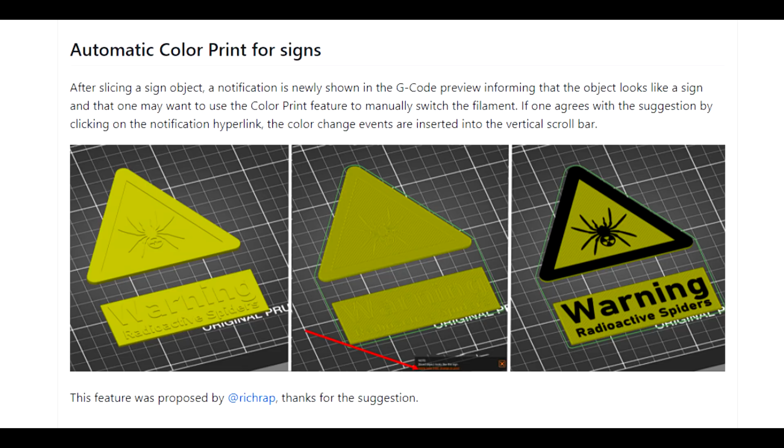First up is the auto colour change detection feature, which I'm excited about because I do make a lot of signs, being that kind of person. I have to say this is more of a quality of life feature because it doesn't do anything that you couldn't do before by yourself. How it works? It uses an algorithm to determine whether the object you're slicing is a sign or not. And here's a sign I made to test it. Basically, you slice it, then the dialogue comes up in the corner like so, and you click it, and it puts the colours in, and you have to slice again.

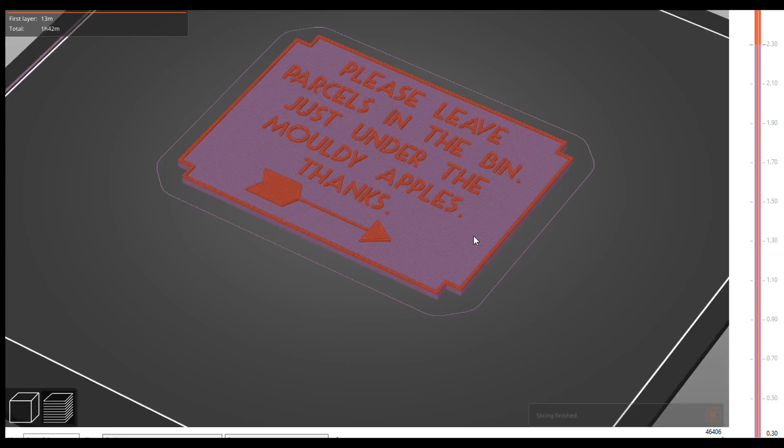Of course, I had to know how Prusa Slicer decides what makes a sign, and I couldn't find it documented anywhere other than in the release notes, which is a bit vague. So, I poked around in the code, and I found this. Now, trying to understand code is literally the worst way of documenting a feature, so I'm probably going to get some of this wrong. But you can see this section contains the logic. I think it's all the logic, actually, which is nice.

We've got, if it's a new print, then work out the X and Y size and the height, and check if the object's height divided by the longest size is less than 0.3. So, in plain English, we're looking for something flat, basically, here, I think, in dimensions. If not, it just jumps out of the if statement, which avoids the dialogue coming up. Next, it does some stuff where it's testing if 25% of the height is a solid object. This is using some maths that I'm not going to work out, and as you can see from the comment, the bottom layer to object size is also important.

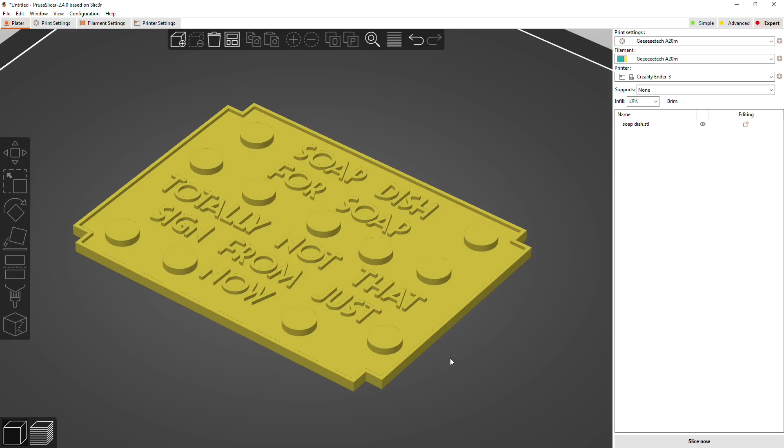And if all of this is true, you will get the sliced object looks like the sign notification, which is translated to whatever language you're currently using. So that's pretty reasonable, I think. Of course, you could fool it into thinking you have a sign when you don't, but whatever, just don't click on the prompt when it appears. I personally like this functionality because it saves you having to spend time working out which layer to colour change, and it saves you having to learn how to colour change if you haven't actually done it before, or if you've forgotten how to do it. As to what it actually does, it puts essentially what's in this box here, in the machine settings, into the G-code. Here we can see that if we search for it in the generated code.

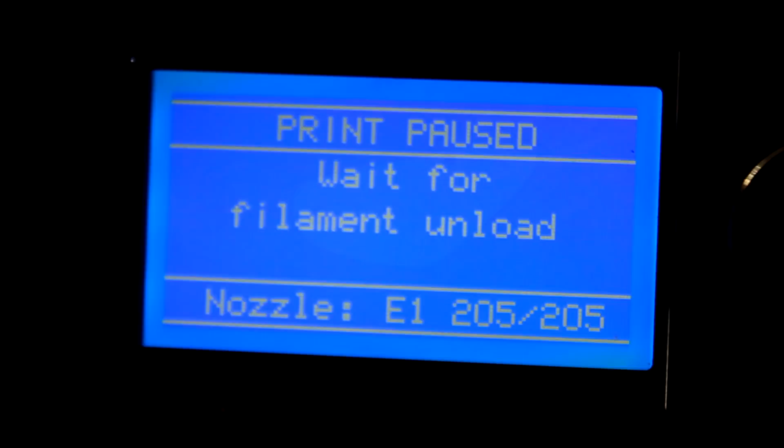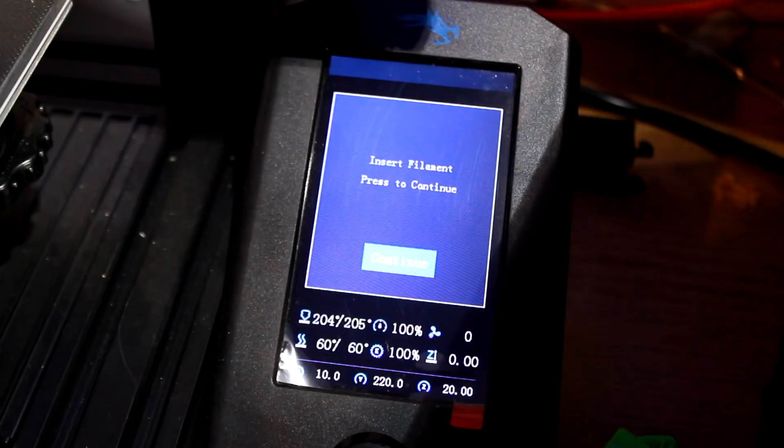And it works fine, as you can hopefully see in my footage. When the printer hits the M600 code, it will behave however its firmware has told it to. This depends on the printer and the firmware. It either spits out the filament out the back and asks for more, or it makes you change it yourself. You just follow the prompts.

By the way, if you have an Ender 3 V2 like I do, you absolutely must install Jyers' firmware or another firmware for this to work. The stock firmware does not work with M600 codes. I forget how it doesn't work. I think it's an issue with not being able to disable individual steppers, so it's really hard to get the filament out and back in again, and if you disable all the steppers, the gantry will drop. Yeah, it was something I tried a while ago and I just gave up. But I don't want to revisit that. The answer is just install Jyers' and it will work perfectly.

Anyway, and this is good, if you have a multiple extruder printer, in my case the Geeetech that I've mentioned before, with the mixing nozzle, they have made provision for this too. Instead of the colour change code that I showed you, it will put a tool change code in there instead. So for the Geeetech, it sticks a T1 in instead of the M600. This is why it's super important: if you have a mixing nozzle or dual extruder setup, you must set up that in Prusa Slicer for this to work. That's enough of that though. Next feature.

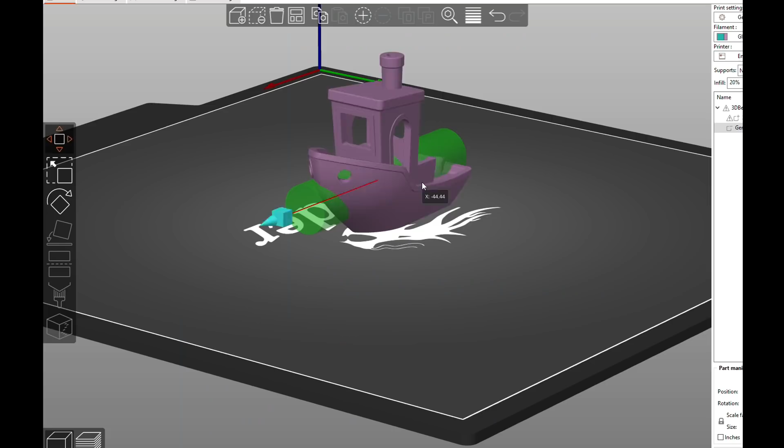Negative volumes. This is probably the most underrated feature of this whole release. Seriously, if you CAD, then you will immediately recognise this as a Boolean operation, or whatever you might call it. You can do this in all CAD packages, and it is pretty core to making just about anything. The key takeaway, pun intended, is that Prusa Slicer is letting you do these operations on an STL file, and it's really neat. You don't end up with a weird meshy mess. So it's something you really need to be using in Prusa Slicer if you aren't already.

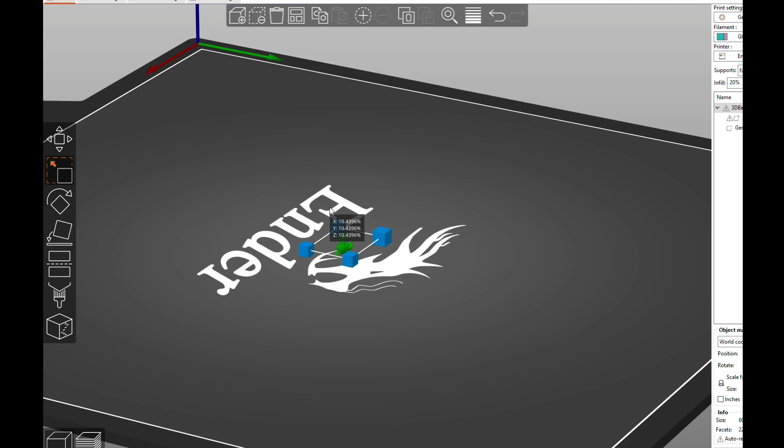I set up a couple of scenarios to help you figure out some uses for this feature. Firstly, I put a cylinder right through a Benchy and I made a Benchy bead. The cool thing about this feature is that if you're adding a modifier to the object itself, as you can see, when you shrink the object, the modifier shrinks too. It's relative to the object. This is really user-friendly, really useful. And of course I printed it out, here it is.

The next scenario is to put screw holes in just about anything. This is really simple, almost effortless.

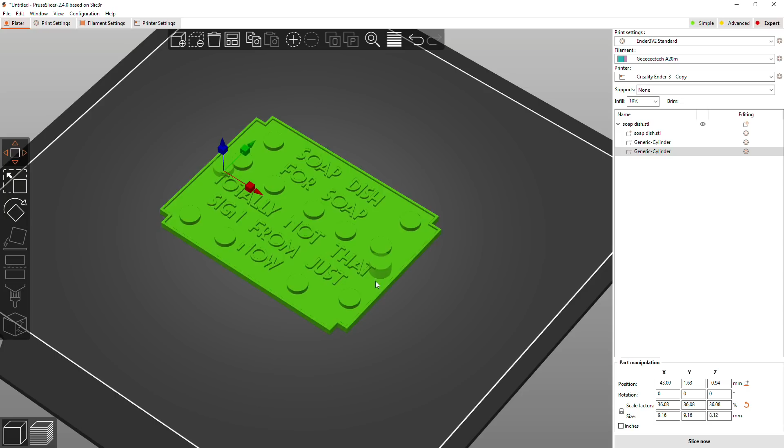Finally, and this is the most cool of all, you can make your own STL-shaped holes in anything too, so you can subtract one object from another. Apart from hilarious composite objects, of course, this means you can personalize stuff with any logo or image so long as it's a 3D object. This means that you can do things in the slicer that you previously would have had to combine two objects in a positive manner. That would be a logo sticking out. You can now do it inwards as well.

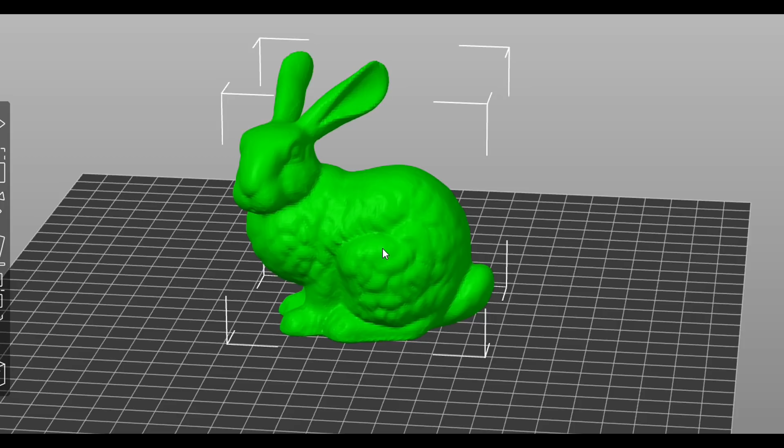Absolutely brilliant. So finally for this episode we have mesh simplification. Again, this is something really cool that you would normally need to use another package for. In this case I think Blender is probably the go-to tool for this. I've used Blender to do it, and Blender does do it well. But again, Prusa Slicer is doing this effortlessly and really well. You can see here I simplified the Stanford bunny. The cool thing is that this is actually also iterative, meaning you can simplify it all the way, and then if you want to simplify it some more, you can do it again, and it will work fine. The net result is a really cool polygon rabbit. This is definitely a feature that I'm going to be using quite a lot.

So that's the first of, I think, probably three videos on this new version. I feel like by the time I get to the last one, there'll probably be another version with another raft of features at the rate that they're going at the moment. So thumbs up to the Prusa Slicer developers if you end up watching this. I know I didn't expect any attention from Ultimaker in my last video, but I was surprised that it certainly got seen by the development team. So if you're watching this, Prusa Slicer devs, then keep at it. We do appreciate it. And tree supports, maybe.